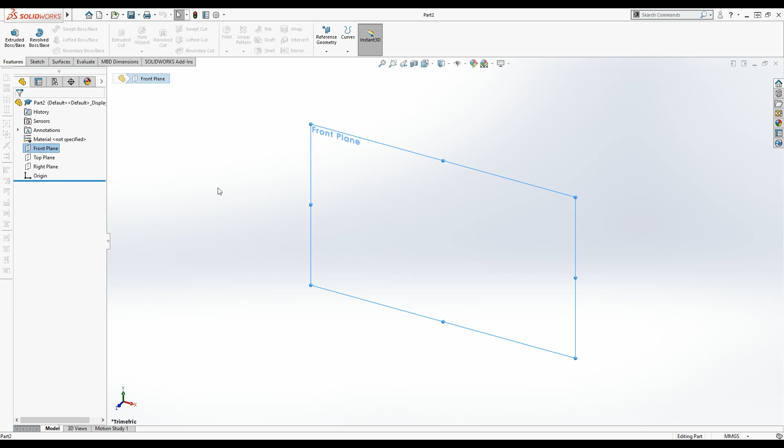Okay, so I've already gone into a new part and chosen the front plane. And we just want to look at the main outline of the model first, and there's a few bits to extrude at different times. So I'm going to use the extrude boss base tool, get the circle tool, and snap to our point of origin. Again, just keeping everything nice and centered.

Now the cylinder at the top is hollow, but I'm going to leave it solid to begin with. All right, the diameter for this is 50.

I'm then going to get the center line option, snap to the center of the circle and move out to the left. The length of this line should be 80 millimeters.

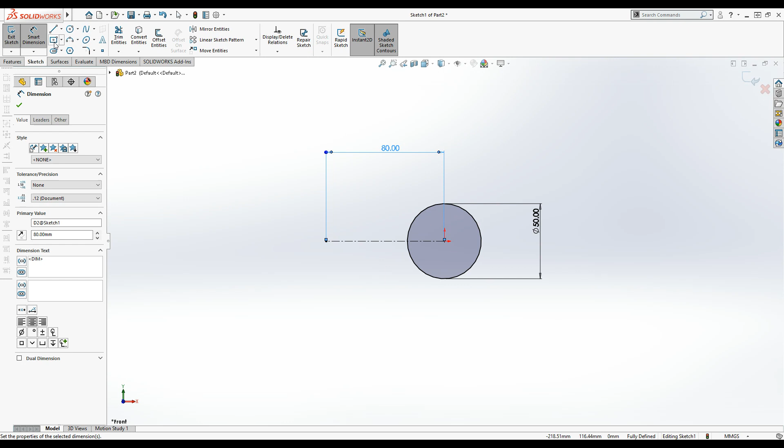And I'm going to use a centered rectangle from the end of that line and smart dimension that rectangle to 50 wide and 65 in height.

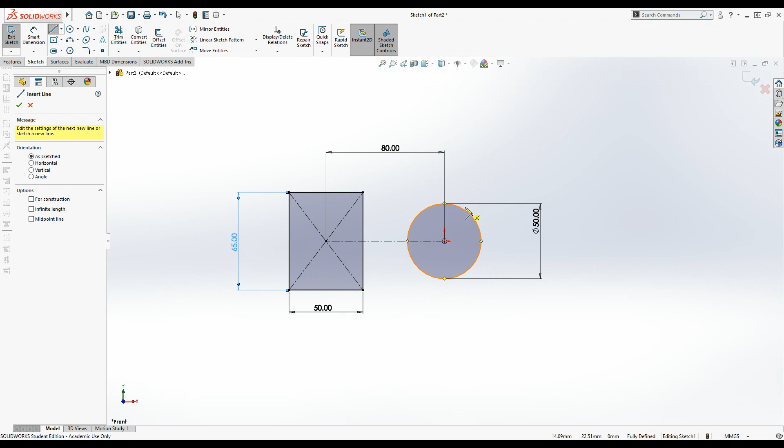Now we just have to do some tangent lines. So I'm just going to approach this circle here, and sometimes you can get it to do it automatically. If you click just from the outside here and then move away, you can see I've got a nice tangent join. So I'm going to connect that.

And again, as in previous models, we can just use the mirror tool to mirror this line over. So mirror entities, choose entities to mirror, which is going to be the diagonal line. Click in mirror about and choose the dash line and green tick.

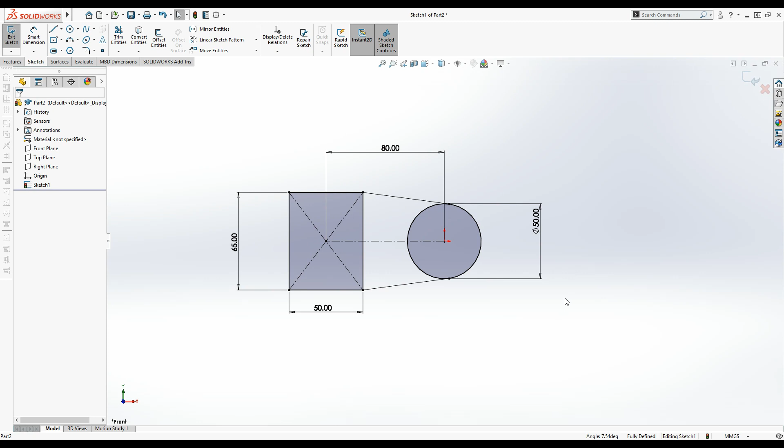Okay, that's really the sketches for the main backplate of the model. So let's go with that for now. We've got an 8mm extrusion, so exit the sketch, select contours and choose the different segments and extrude by 8mm.

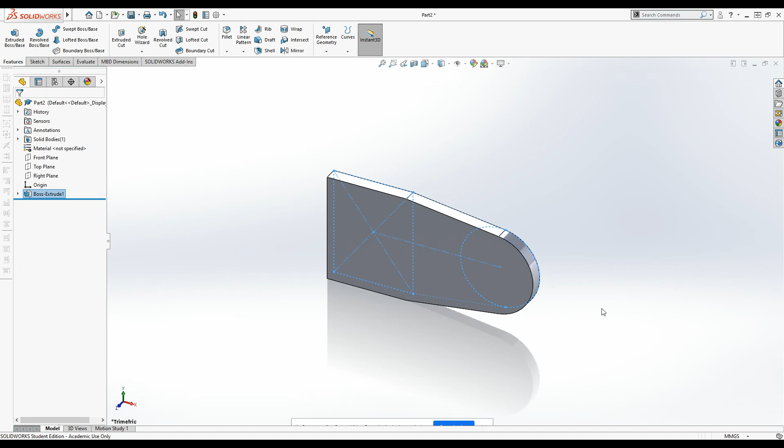Okay, green tick. All right, now I actually want to use the circle again for the cylinder. So as before, I'm going to select my sketch from underneath my boss extrude, choose the circle, and we need to add multiple directions. So overall, it is 40 millimeters.

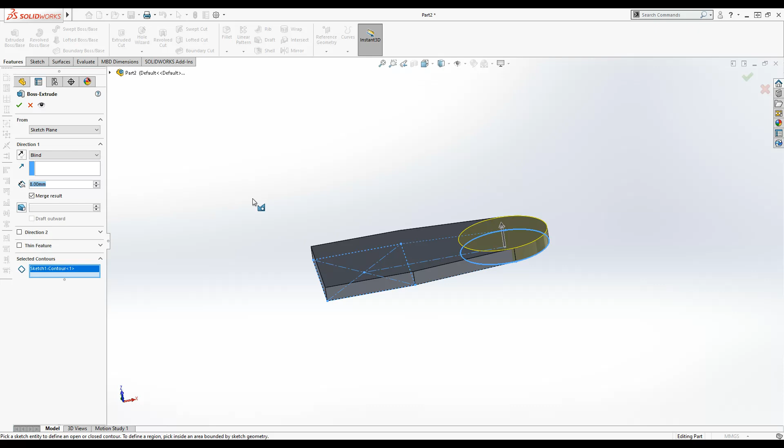So I'm going to put 40 millimeters minus 5 in here as it shows on the drawing, so 35. And then direction 2, add the remaining 5 underneath. Okay, green tick to complete.

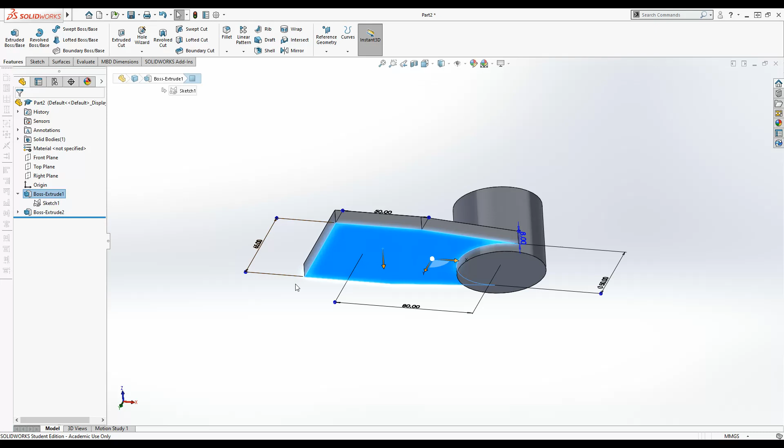Alright, there's a small rectangular section added on the back, so I'm just going to choose the back surface and go into extrude. Change back to a corner rectangle and snap to the corner here and move across to the other side, slightly lower.

Dimensions for this, we don't need to worry about side to side because we've already snapped that into the width of the model, but the height is 10 millimeters.

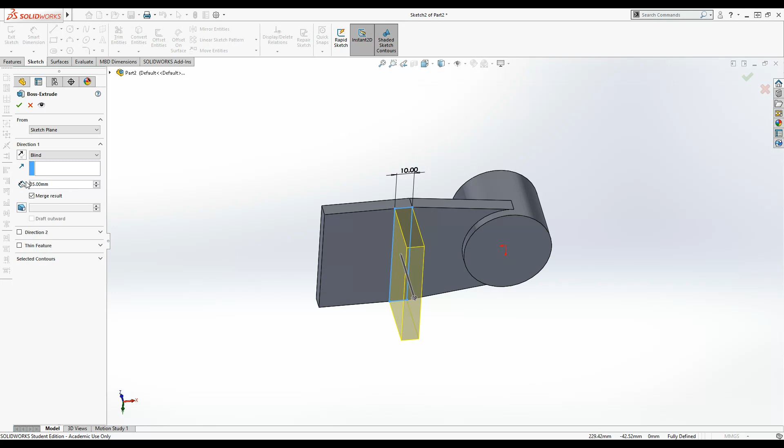Exit the sketch and extrude by 5. Green tick to complete.

Okay, we've got a raised section. There's a rib, and then there's a boss and a couple of holes and things to add. All right, so let's concentrate on the raised section here first. So I'm going to choose this top surface.